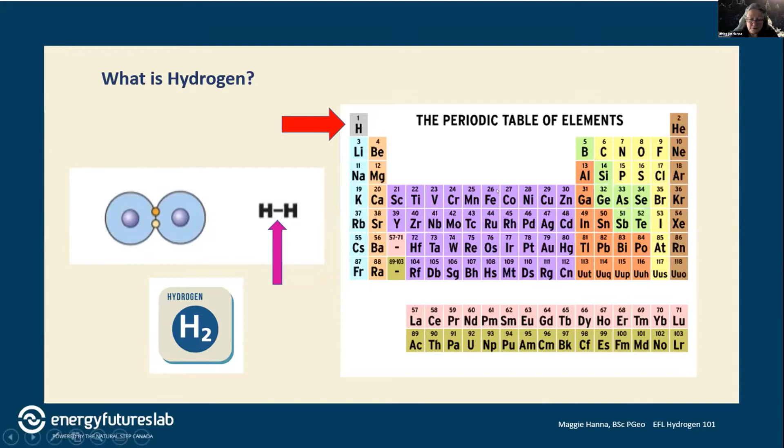There is a lot of hydrogen in the universe. About 73% of all the atoms in the universe are hydrogen, and it is the fuel of the universe. However, there's very little hydrogen roaming around by itself on Earth. Most of what we have is tied up in ocean water, so we have to actually use energy to make it. Hydrogen is therefore not an energy source, it's an energy carrier — or it can be called a fuel as well.

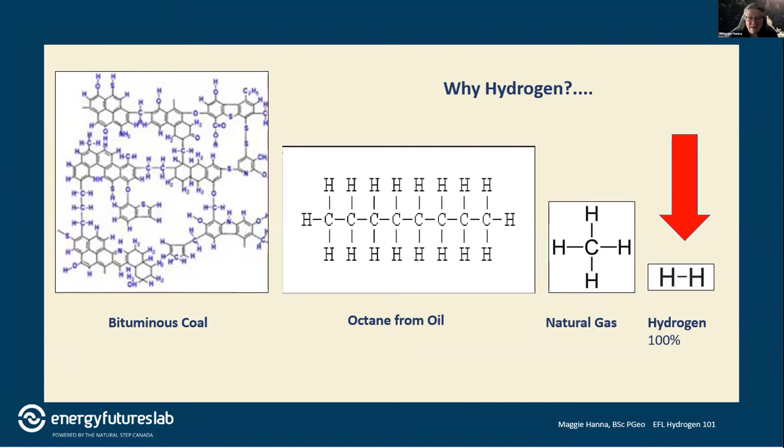So take some time to look at the hydrocarbon chemical structures. The first three molecules represent coal, oil, and natural gas, and you can see there are lots of carbon atoms in there. When we burn these for energy, CO2 gets released into the atmosphere. But where does the energy actually come from? Most of the energy is held in the hydrogen-to-carbon bonds, and when we break those bonds by burning hydrocarbons, we release the energy for our use. So why hydrogen? Shown with a red arrow, there are no carbons at all in hydrogen. So when we break the hydrogen bond for energy, no CO2 results, only water — and that's why hydrogen.

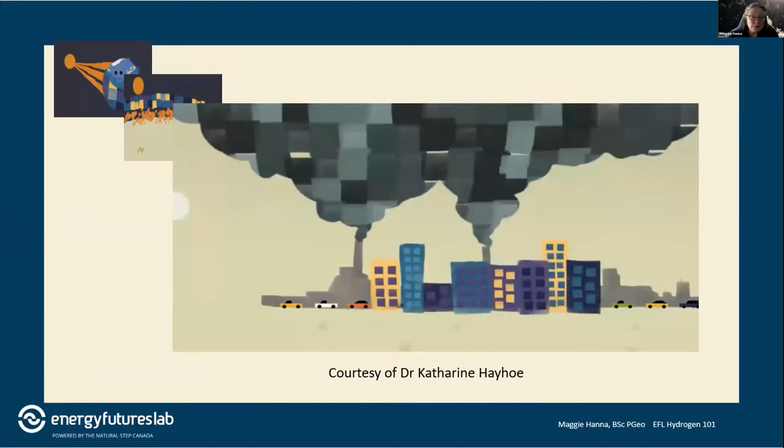So we're trying to keep our planet under 2 degrees Celsius of extra atmospheric heating, which doesn't sound like much because we think it's just about air temperature outside. No big deal, right? But that's not the way it works. That's weather, that's not climate. Climate is measured as an average of the weather over 20 to 30 years, and it works more like a fever in your body. If your body ran an extra, like a 2 degree chronic fever of say 39 Celsius, or for us older folks, 102 Fahrenheit, then you wouldn't be operating very well either.

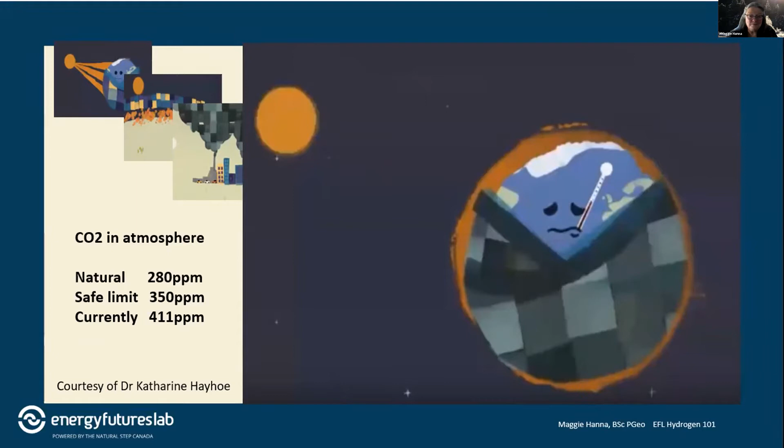Industrial heat like for steel and cement making. Seasonal large scale electrical power storage, hydrogen is the only thing we've got. Space and water heating, and feedstock for fertilizer production and other chemistries.

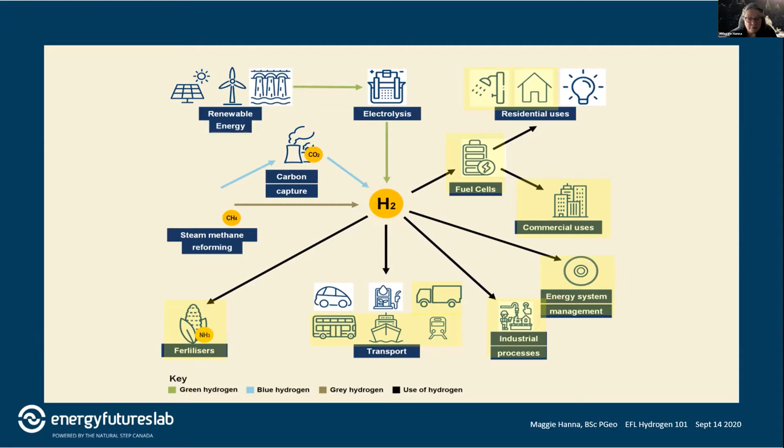The world is getting onto this now, and some countries are moving faster than others. Over 25 countries in the world have already published their hydrogen strategy. And in December, Canada released our federal hydrogen strategy, 141 pages, which was very well received, I might say. David Layzell, who you will hear from next, had a lot to do with that document.

So you can see that what really matters is not so much the color of the hydrogen, but it's the actual carbon footprint. Anything less than 5 kilograms of CO2 is considered to be low carbon hydrogen by the European Union. Still, I think it's useful to know what the colors mean, so let's get into that.

Generally, the 3 lowest carbon footprint hydrogen processes are pink, which uses nuclear electricity for electrolysis, which splits water into hydrogen and oxygen, and also green, which uses renewable electricity from hydro, wind, solar, tidal, wave, geothermal, to do the same thing. And also blue, which uses natural gas and water to make hydrogen and CO2, on the condition that that CO2 is sequestered permanently in the ground. They are all considered low carbon hydrogen by the EU's definition. So that's the first 3.

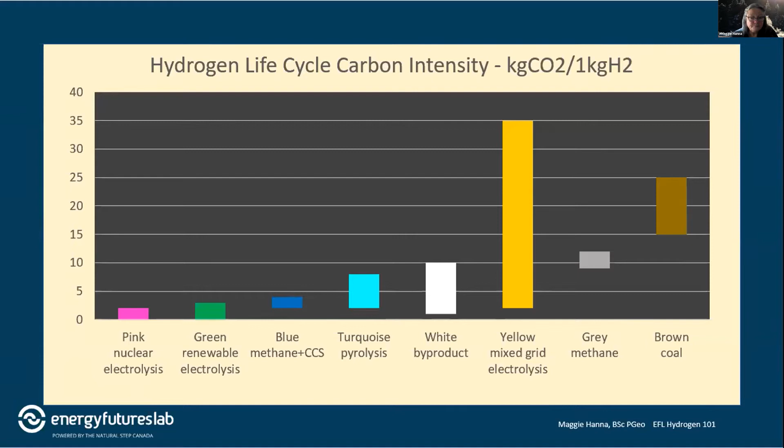Turning to the Canadian domestic hydrogen market, we estimate by 2050 Canada alone will need to produce about 7 times the amount of hydrogen that we do today. This means going from 8,000 tons of hydrogen a day to 58,000 tons a day. Now, that's a big domestic market. How the heck are we going to get that done?

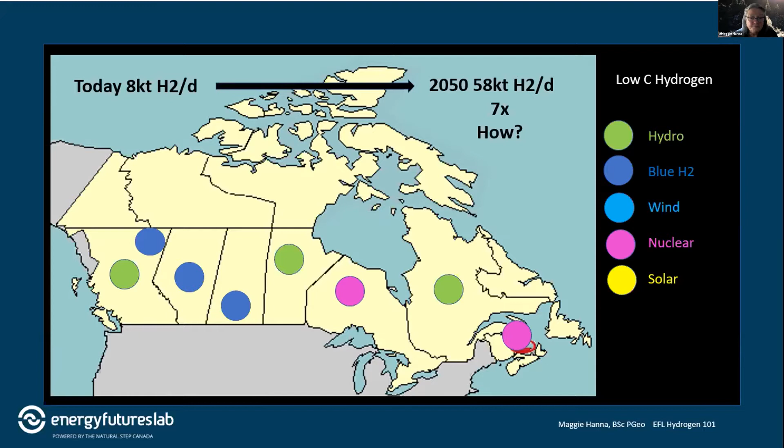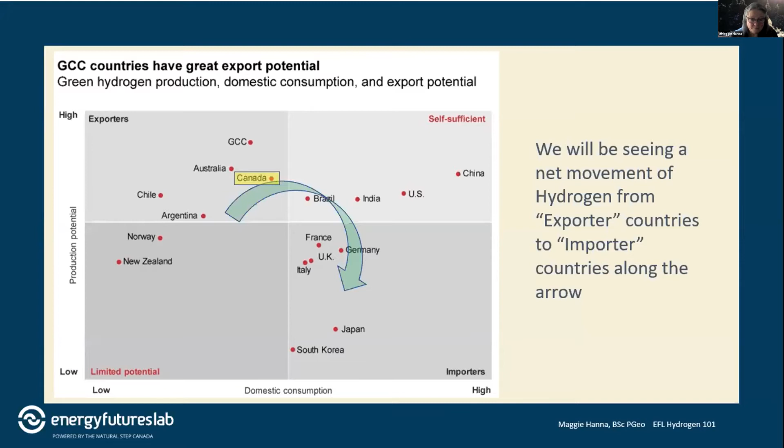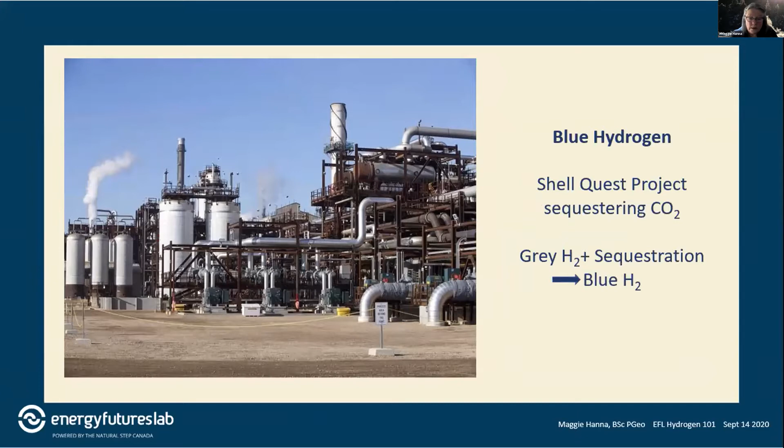The Industrial Heartland Working Group have set the stage to be Canada's first hydrogen hub northeast of Edmonton, and is working with the Transition Accelerator. Dave Layzell will say more about that right after this presentation is done.

So the AZETEC project, out of the University of Calgary's CESAR group, is building 2 big hydrogen fuel cell powered Class 8 freight trucks for test runs between Calgary and Edmonton starting this fall. Now, I want you to notice the range of companies in this collaboration. Collaboration is the only way we're going to get this hydrogen economy thing done, because of the chicken and egg nature of supply and demand when it comes to hydrogen. Hydra is another one of our corporate gems involved in hydrogen trucking, as you will be hearing from the President Badr today. So that's pretty lucky.

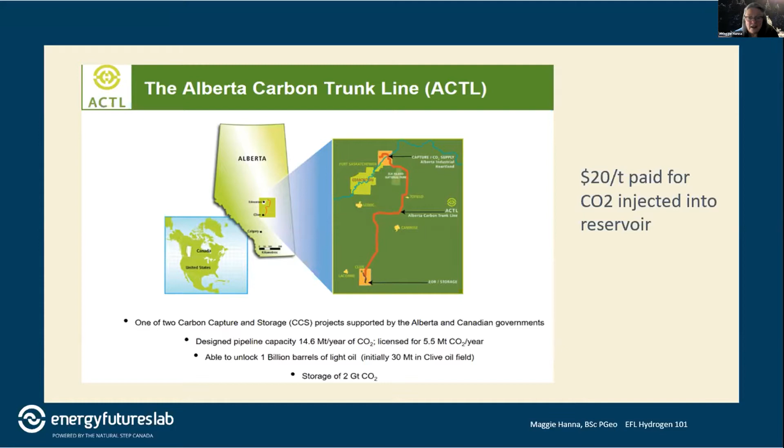ATCO is working on blending hydrogen into natural gas pipelines in the city of Fort Saskatchewan.

Maggie, your audio just went out. Can you hear me? Am I back? Oh, I just got your internet connection is unstable sign. Can you hear me now? Yeah, loud and clear now. Okay, so let's just go back to this.

So if you didn't hear me, I just wanted to say that ATCO is mixing 5% hydrogen into their natural gas lines, and they hope to ramp that up to about 20%.

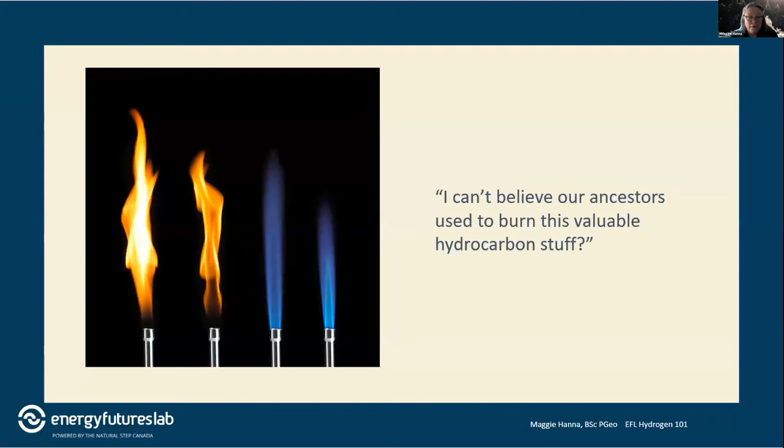So now we'll go next. Bottom line is, in Alberta we have a good start, but we have a lot of work to do collectively. Some jobs to generate and some carbon to mitigate. But if we get this post-carbon energy transition stuff right, future generations will look back at us and laugh, saying, I can't believe our ancestors actually burned this valuable stuff. It's good for so many other things.

You're really in for a treat today, hearing from some of the movers and shakers here in Canada. They're the people that are actually making this happen. So finally, thank you for your kind attention.

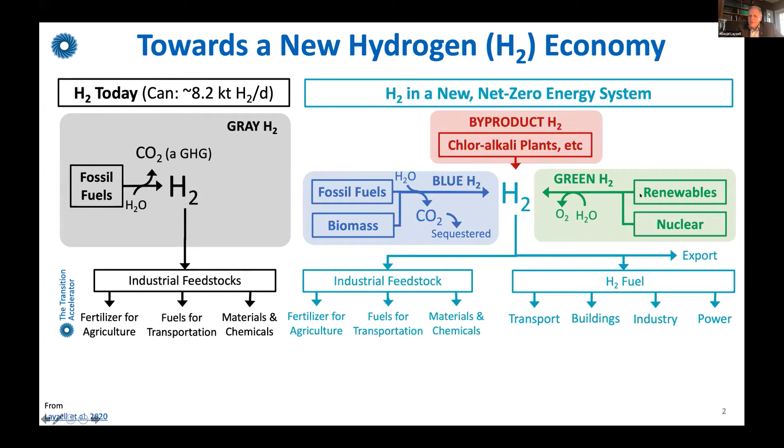And with power generation, hydrogen could become a form of long-term energy storage, electricity storage, because you can use electricity to make hydrogen and then use hydrogen to make electricity again.

And certainly of all the countries they looked at, Canada is the lowest cost in the world for making green hydrogen. But what you'll notice here is that blue hydrogen today tends to be less expensive to make than green hydrogen. Indeed in Alberta and Western Canada, blue hydrogen is about half the wholesale cost of diesel and about 1/3 the retail cost, so that opens up a really interesting opportunity for trying to grow a hydrogen economy with those kinds of feedstocks.

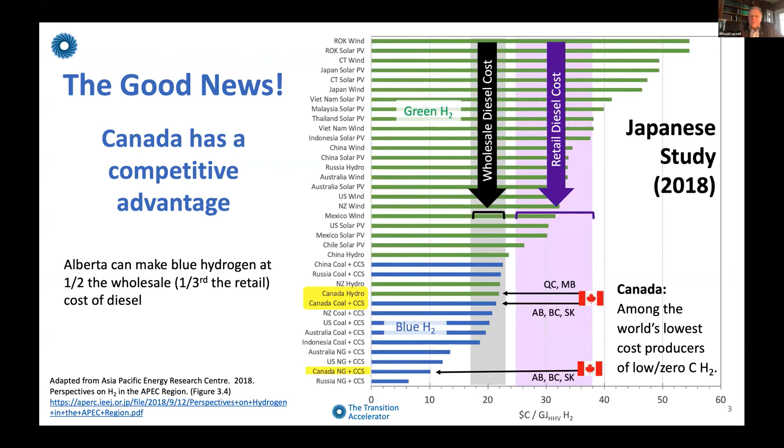But the challenge with hydrogen is that it's a gas. We could make it quite inexpensive, lower than the cost of diesel, but it's more expensive to move and store around than liquids.

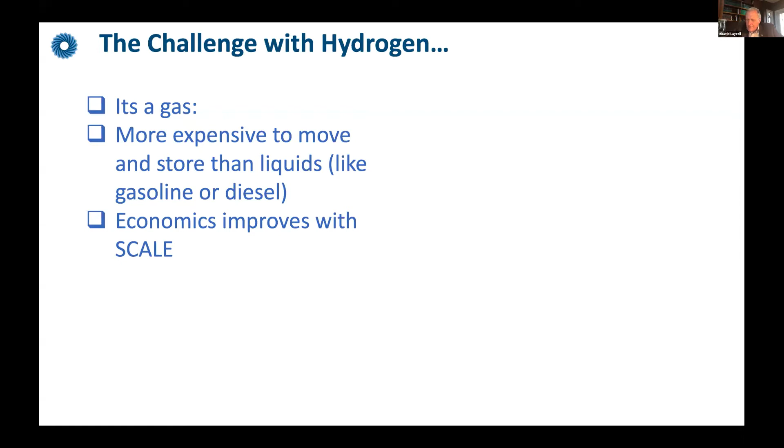The other thing is the economics improve with scale. So as you start moving more hydrogen around and having greater use of hydrogen, the actual cost comes down quite dramatically. So our analysis is we really have to go big or go home - we have to get to scale quickly.

So what we are arguing is we need to focus on hydrogen hubs - places where we have low cost hydrogen production, substantial nearby market demand, and a cost-effective connection between the supply and the demand. The most obvious is pipelines, especially if we can get to scale where pipelines make sense. And we need engaged industry, governments, and academics working together to put this new value chain in place.

We've been looking at where to do this across Canada. One of the areas we see as a significant opportunity is in Alberta, around areas where we already have large-scale industrial blue hydrogen production. Including the cost of CO2 capture, we can make hydrogen at about $1.50 a kilogram.

And we can then piggyback on that kind of industrial infrastructure, pull a pipeline off, and provide the hydrogen to buses and trucks, to trains, for transportation, space heating for homes or commercial buildings, and even possibly for power generation. And this pipeline, the same infrastructure, could be used to bring green hydrogen to market as well, if the pipeline goes through a region where we have good green hydrogen production.

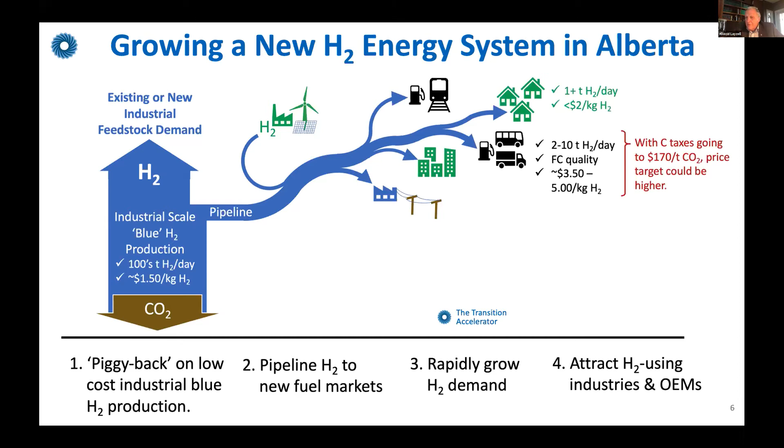The idea is to have pipelines connect to new markets, rapidly grow these demands for hydrogen, and also attract an opportunity to bring in internationally hydrogen-using industries and original equipment manufacturers that are interested in benefiting and growing their business through hydrogen supply and demand.

Within Alberta, one of the most promising areas is right near Edmonton, and we call it the Greater Edmonton Hydrogen Hub. It already has a hydrogen pipeline shown here. As Maggie talked about a bit, it has the Quest CO2 line up here, and the Alberta Carbon Trunk Line for enhanced oil recovery here.

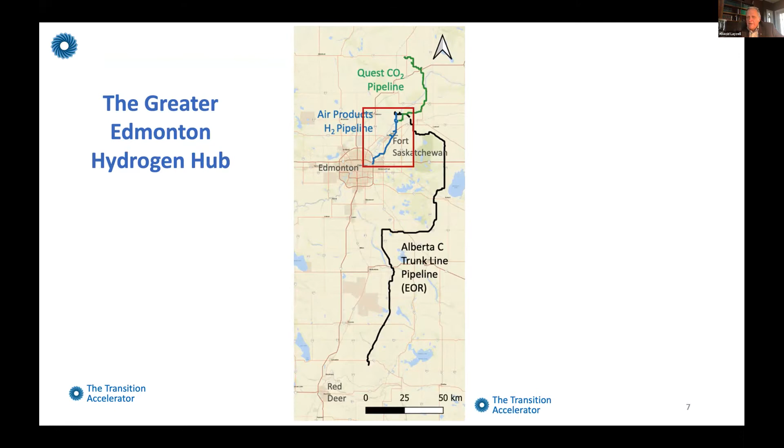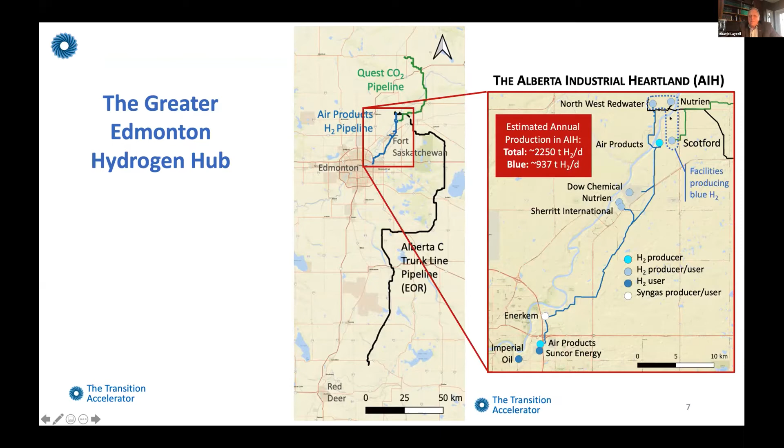So two pipelines that carry away the byproduct, the CO2 that you create when you make blue hydrogen, and a number of companies that would be using that hydrogen. In fact, three of the companies already are producing blue hydrogen and putting the CO2 in the pipeline. So what we see here is the opportunity to find markets, potential market sizes.

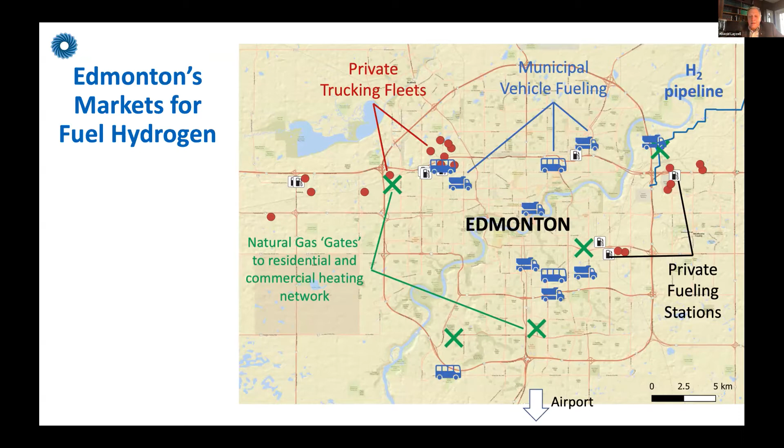We've estimated in the work we've been doing that there's a potential in the whole area for transportation demand of about 670 tons of hydrogen a day. This is just in the Edmonton region. There's potential for space heat in the 1,500 tons a day range, which would of course be higher in winter than in summer, and potential for export in many thousands of tons per day.

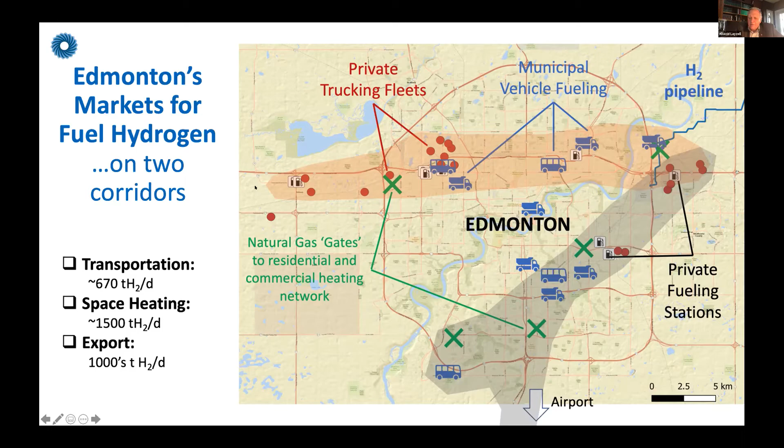The important thing to note is that virtually all of the demand for these occurs on two main corridors, both anchored where we can produce low-cost blue hydrogen. One is a corridor that comes diagonally through Edmonton and heads down towards the airport; another one across the top of the city. So the conclusion here is that hydrogen hubs are needed in order to get to scale.

And to build a resilient new hydrogen energy system, an energy system where we can get production to a sufficient scale to keep the price low, and get demand to a significant scale, in order to have a cost-effective linkage—typically pipelines, but not absolutely necessarily—that would link the supply to demand. These should be deployed at strategic locations across Canada.

Edmonton is one location where we see opportunities; certainly Prince George—we're going to hear about some exciting opportunities there. Sarnia, Ontario, there are places in Quebec, places in Eastern Canada, a number of other places, I would say in British Columbia and in Alberta, that we could actually build significant demand centers around. And then we need to grow these demand centers and interconnect them to serve other communities. We see this as a key part of the strategy, the pathway to a net zero future.

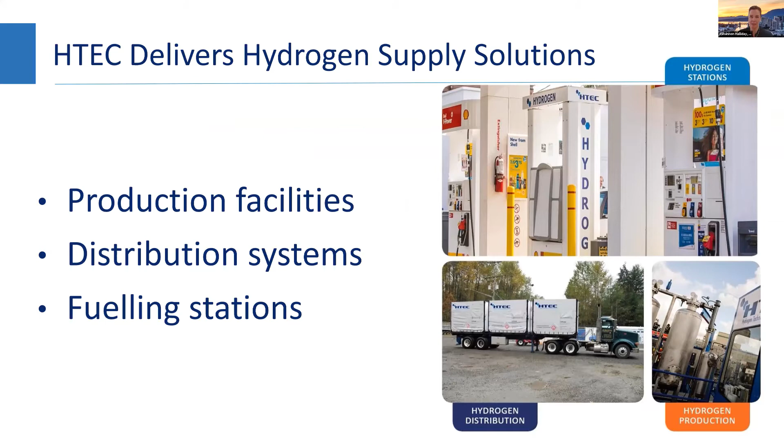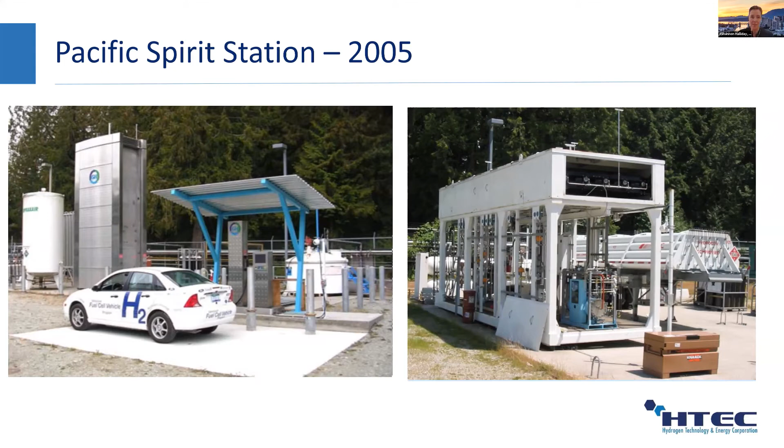It was in the spring of 2005 when the Ford Focus fuel cell vehicles were first delivered to Vancouver. I was working for Natural Resources Canada at the time, and we had funded part of this station. My office was based at the National Research Council building. If you walked out the front, if you were lucky, the compound wouldn't be locked, or you had to walk down the freakishly long hallways of the National Research Council, past the hydrogen safety labs, into the back towards the forest, tucked in was this fueling station. There'd usually be quite a lot of researchers in lab coats milling about. Although there were really excellent learnings happening as part of this station, it is not something that would inspire a quick commercial uptake.

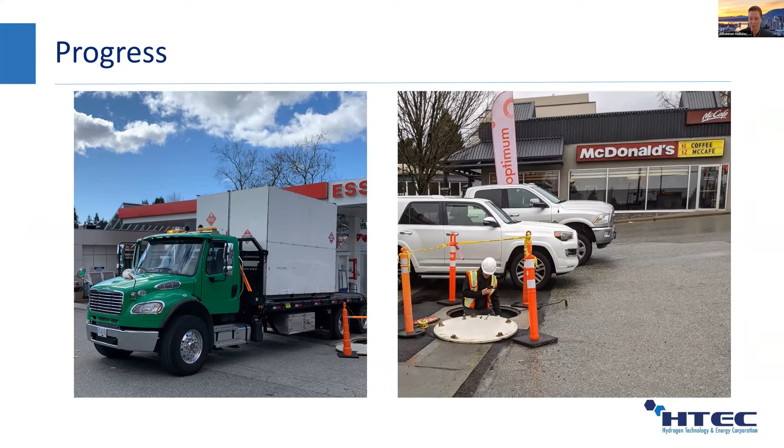Fast forward to the present, this is one of our stations that we opened last year, and our hydrogen delivery truck is delivering, this was just a few weeks ago, hydrogen and power cubes to the station. If you look at the manhole beside the truck, and then in the next picture at the manhole, what do you see in the background? You see a McDonald's, and nothing says that you've achieved a certain level of public confidence like being in spitting distance from a McDonald's. There's no locked compounds, there's no lab coats. We've come a long way in the last 15 years.

And so another way of looking at HTEC in the value chain is looking at it as the glue.

As Maggie mentioned, you can produce hydrogen in a variety of ways, and that's the clean energy supply at the beginning. At HTEC, we currently have green hydrogen production, and we are investigating blue hydrogen projects as well as more electrolysis projects.

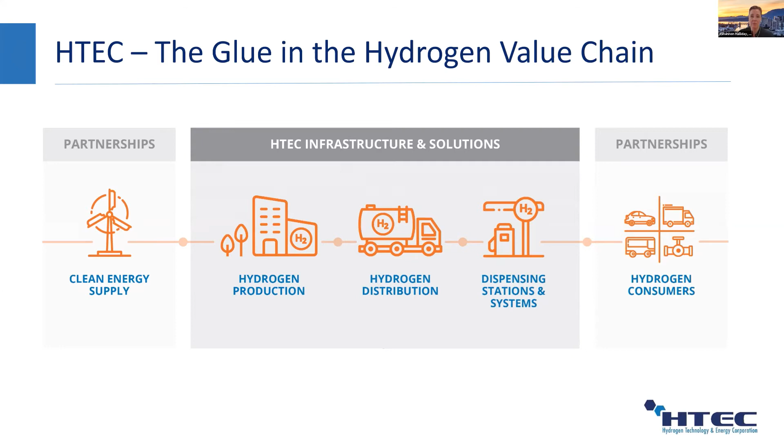At HTEC, we have two business platforms. One is the infrastructure platform where we produce, distribute, and dispense. The other is our technology solutions platform where we help others with their hydrogen needs, from project development, design, engineering, specialty and packaged products, operations and logistics support. And we work in partnership with hydrogen consumers.

We have a station in Quebec with Harnois right now, with 2 more under construction in Quebec. We have 4 stations in operation in BC, 2 with Shell and 2 with 7-Eleven, with 5 more in construction or under development. The next one to open will be a 7-Eleven station in Kelowna. The stations we have in operation right now are light duty stations, but the ones we're opening will be a combination of light duty, medium duty, and heavy duty.

We also have a station in California with electrolysis on site that is opening up this summer.

I just wanted to highlight why light duty is important. It allows options for the public, increases public awareness, advances codes and standards, and all of the cost benefits realized in light duty applications are then applied into larger applications like buses, trucks, and trains. As David mentioned, scaling up is really important, and that's one of the things that light duty allows us to do.

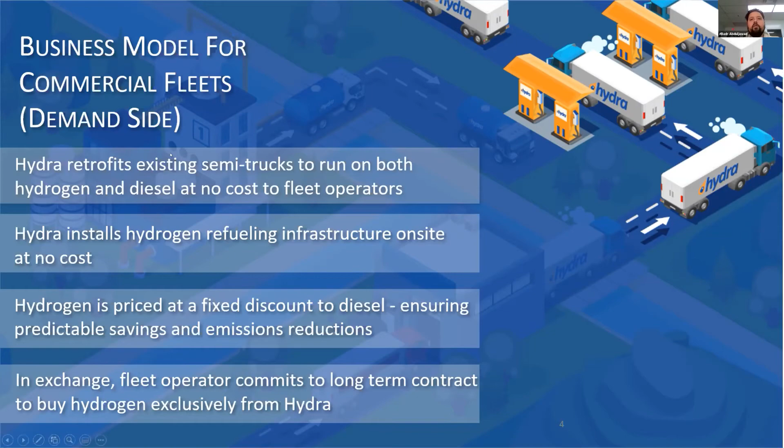So there's no loss in power or torque, no loss in payload, as I've already mentioned, and you guys can see that from our testing results. This retrofit is basically just adding a hydrogen computer that talks to the diesel computer with some hydrogen tanks and hydrogen injectors. And this basically co-combusts with the diesel, so it is a gaseous fuel.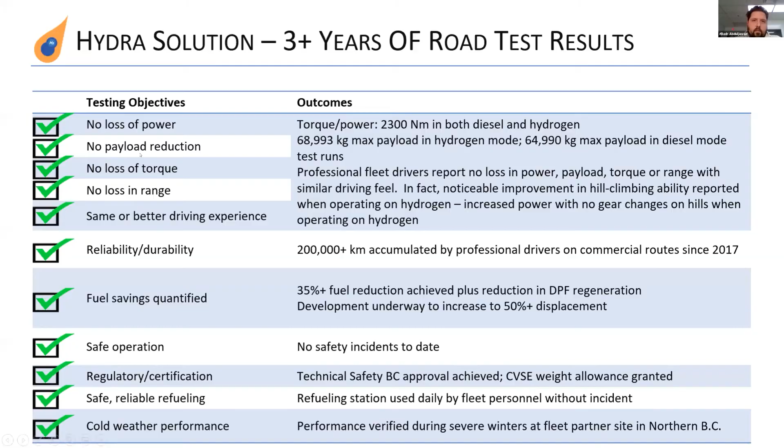And then Hydra's business model is to go with and capture some waste hydrogen. And as Maggie touched on this a bit earlier, in BC, this is considered green hydrogen. And it's also, I guess, considered white hydrogen because it is a byproduct.

So we will expand this business model in a more cost-effective manner. Including hydrogen from electrolysis. It meets our renewable gas content by reducing carbon tax as well.

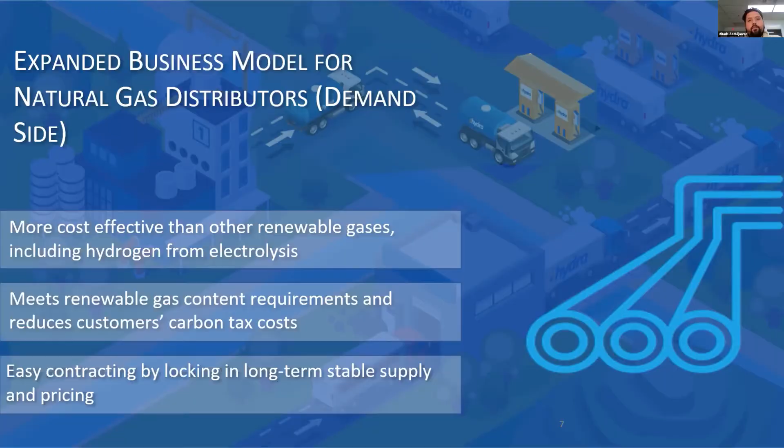Our first project is 65 dual fuel hydrogen semi-trucks. Our first station, the first hydrogen station, would actually be the largest in the world. And it's about six times larger than the fueling station currently in Shanghai.

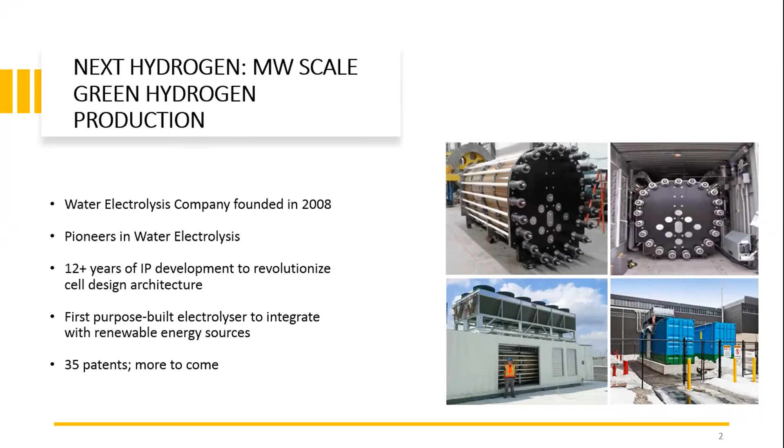Where am I today? I'm actually at a Canadian Tire site in Bolton, Ontario, where we're commissioning a 300 normal cubic meter an hour plant. That's a plant that produces about 650 kilograms a day if it's operating continuously. The plant, of course, operates around electricity market opportunities, so it's not operating continuously. Canadian Tire's purchased 3 of our units. The hydrogen is used to provide fuel for a fleet of forklifts - these are fuel cell powered forklifts.

The interesting thing about this project and what we're doing with Canadian Tire - the project started about 5 years ago. There's no government funding; this is all run off capex, which Canadian Tire has. Canadian Tire is a little bit different in that they were really curious about hydrogen and how it could be scaled up as an infrastructure using electrolysis, producing green hydrogen. They also have a significant presence in retail transportation fuels.

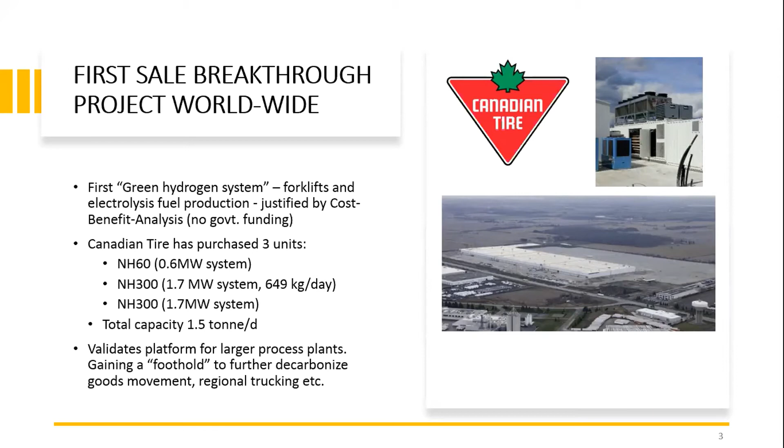So that's where we're at. We're operating systems here at Canadian Tire, scaling up the company. Of course, this is a great time - this is a good time to be in the hydrogen business. So we're pushing forward with building our company and expanding it. But I'll talk a little bit about our electrolysis technology, and that's really our raison d'etre.

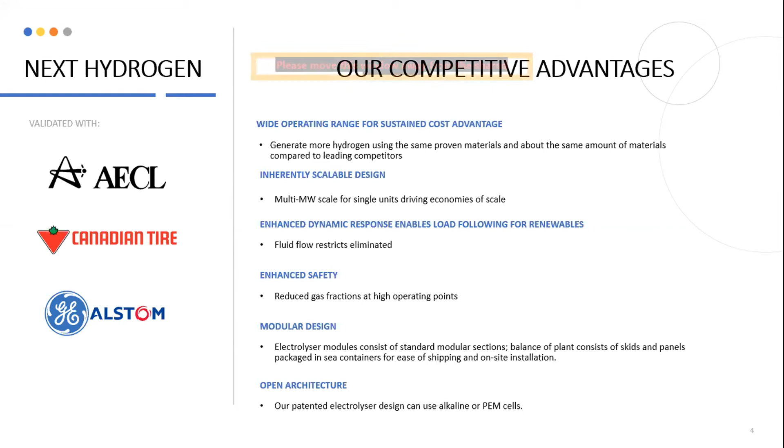This is what we bring to the market, and we think it's a class winner here. So, as I said, the challenge given to the team was to develop a more flexible, more easily integrated electrolyzer, and that involves building at scale - multi-megawatts per unit, advanced enhanced dynamic response, and other things that one would expect in terms of what the market requires today.

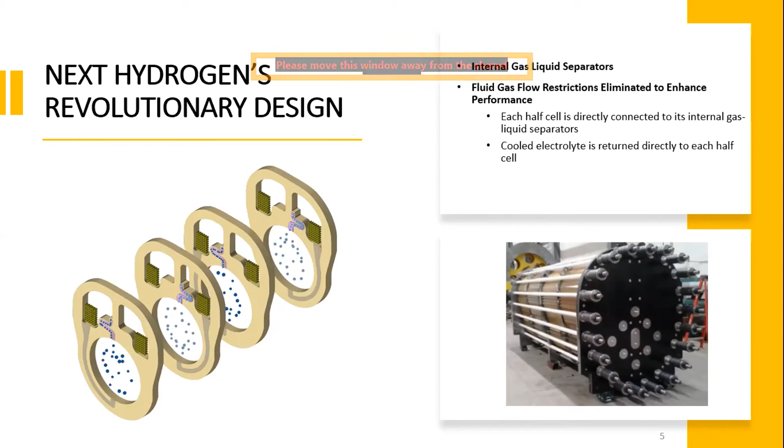What that buys you is, when you look at our system versus a conventional electrolyzer - I'm showing a conventional alkaline electrolyzer, we are also an alkaline electrolyzer, but our architecture can work in both alkaline and PEM - the circulation of the gas-liquid system is actually circumferential and up through the cell, whereas conventional systems have this very long path that goes along the axis of the electrolyzer. One would expect the process dynamics on the left-hand side to be less favorable than the one on the right-hand side, and that's really the architecture we have developed. It's patented, it's unique.

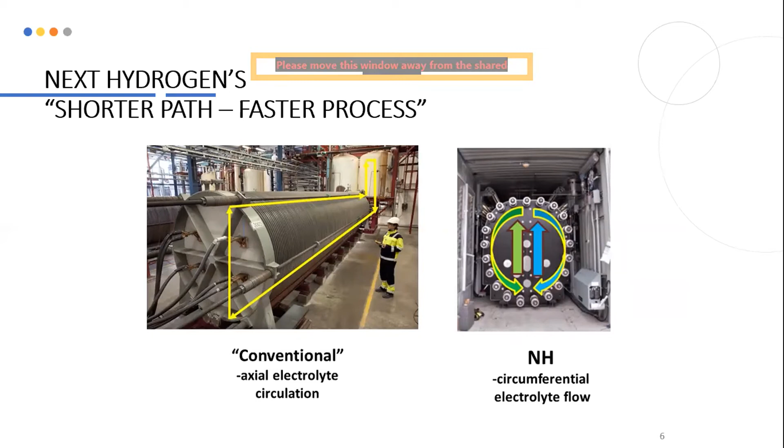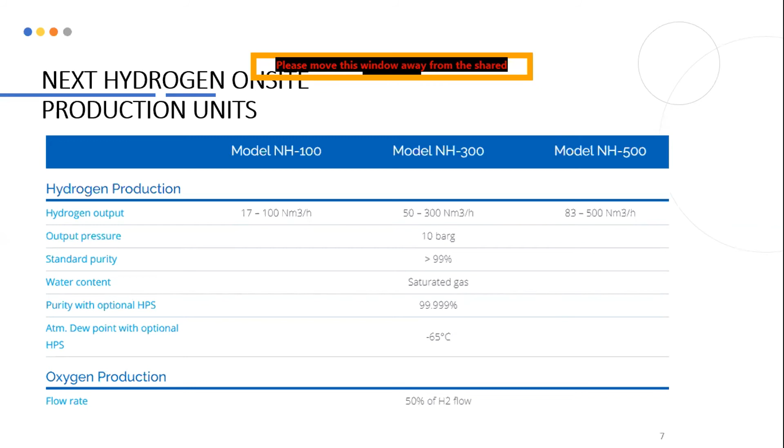It responds quickly to changes in power input. We sell product currently in the 100 and 300 normal cubic meter per hour sizes, and we'll be in a position to release the NH500, I think, in 2022. So that gives you a quick outline, a quick introduction to our company.

And what we're doing - as I said, we're a manufacturer of large-scale electrolyzers, and likely our roadmap leads to even larger units. So something we call the Green, which could be built into dedicated renewable hydrogen projects. Again, we have the flexibility because of our architecture and our ability to operate at very high specific production rates, or what we call current density, which allows us to produce a very capital-efficient large-scale plant.

And with that, I'll take questions. There's a couple quick questions about the retail cost of hydrogen, and a lot around the fact it's intermittent. Can you maybe answer how best to address that question?

Okay, so there's a lot going on with hydrogen and electricity these days. If you look at these large dedicated projects, in Australia or the Middle East, you're looking at renewable power prices less than 3 cents a kilowatt hour. You're getting production costs in the $2 to $3 a kilogram range, based on a life cycle cost of hydrogen basis. If we're looking at something like Canadian Tire, what we're targeting is less than $10 a kilogram in the vehicle. This is purpose-built infrastructure, meaning very good capital utilization. It means electricity rates according to ICI, without the global adjustment in Ontario, which would put it around 8 cents a kilowatt hour. So we're coming in at less than $10 per kilogram in the forklift - that includes the infrastructure, the compressors, the dispensers, etc.

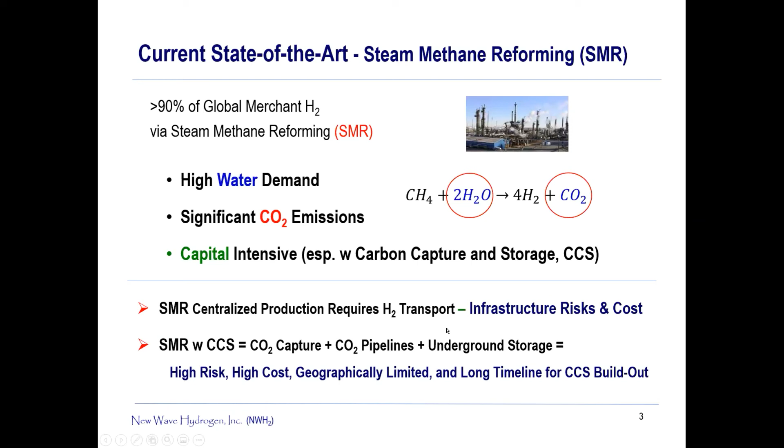So for SMR to become a low impact technology, or greener or blue hydrogen production, it would require a parallel build out of CO2 pipelines and many different new storage infrastructure programs. And this is a really high cost, it's high risk, and it's going to take at least 10 to 20 years or more to have a significant impact, due to the timelines and build out.

So what we suggest is a fundamentally new approach to methane pyrolysis. I call our process a new energy paradigm because we don't need electricity to drive the reaction. We use the pressure inherent in a pressurized natural gas pipeline to drive the shock wave. So it's an efficient use of energy, and it can heat the natural gas to temperatures high enough to directly crack the methane molecule into hydrogen and solid carbon. And these are both valuable products. But as you can see, there's no water and no CO2 in the equation.

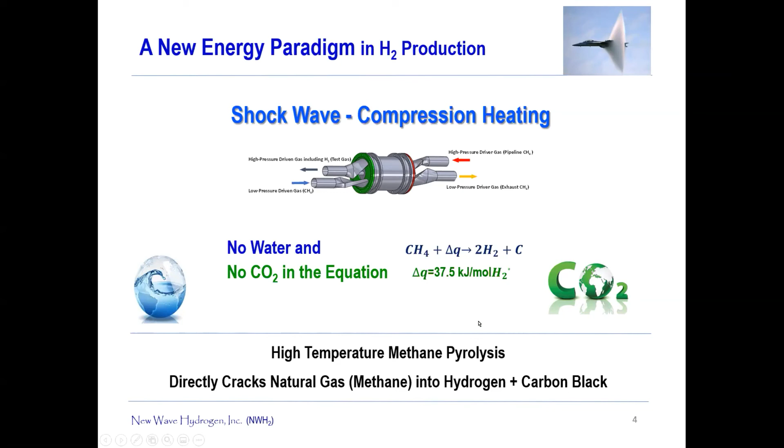This is a new application of wave rotors. Wave rotors have been around for about 50 years, so it's very low risk in terms of development. We're using a core component that's been known for 50 years, and in fact, all of the components in our process are standard and commercial. Our patented innovation is the novel application. So we use wave rotors to achieve gas temperatures sufficient to directly crack methane into hydrogen. So it's a new use of this technology.

Wave rotors can be envisioned as a rotating barrel of shock tubes with end plates that have ports in them. And when a closed port aligns with one of the shock tubes and we introduce a pressurized gas, the gas reflects off that closed port in an enclosed space and creates a shock wave. So it's kind of a supersonic speed that compresses the gases and transfers heat. So we amplify the temperature of the natural gas.

We have tremendous global partners, with whom we've launched from Canada a 2-year program, and hope to achieve a field pilot by the end of 2023.

This 2-year program is funded both by industry and agencies in Canada as well as Europe. Some of the partners mentioned are on our team: AMTA and the AZETEC program are doing hydrogen fuel truck trials, along with the Transition Accelerator and CESAR. They've been tremendous partners, and we're really excited to be working with them.

The NGIF is a natural gas innovation fund, a consortium of natural gas producers and distributors in Canada, and they're a co-funder of ours. Total in Europe is also a co-funder, as well as GRTgaz, a major natural gas producer in Europe. We've also been co-funded by ERA, the Emissions Reduction Alberta.

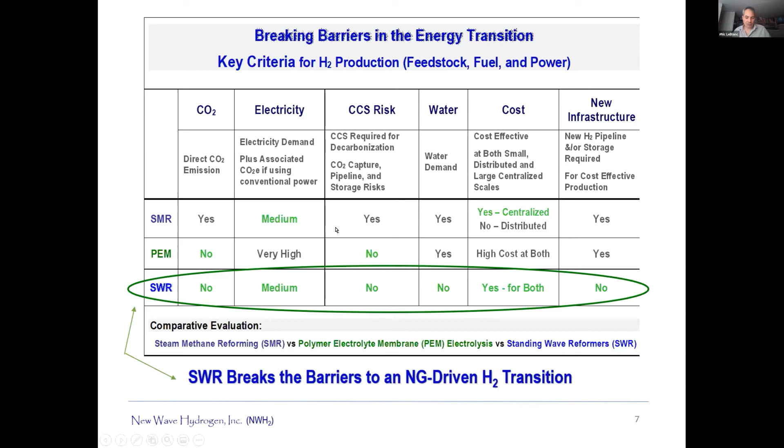Okay, so in essence, really the key to our differentiation is that we can use the existing infrastructure, the natural gas distribution infrastructure. We don't need any new CO2 pipelines, we don't need any new hydrogen pipelines, and we don't need carbon capture and sequestration. We use what's already existing to move the transition forward in a very quick manner.

And it's the same with export. We don't need new types of ships or chemical transitions to hydrogen, because you can export the natural gas the same way we do right now, and export the technology to produce hydrogen on demand wherever you have a pressurized pipeline.

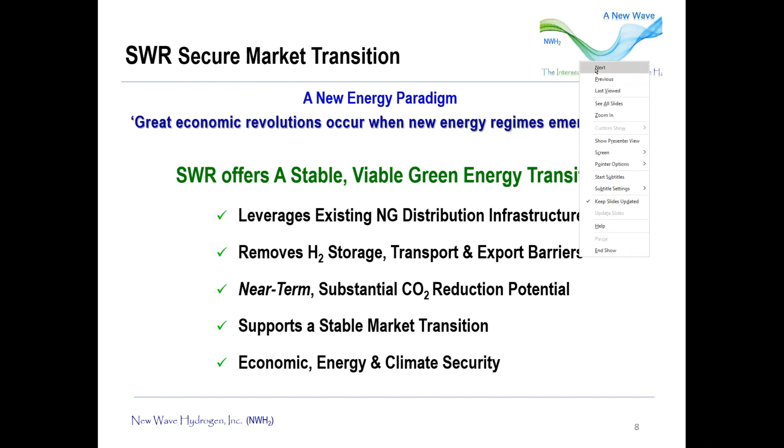Okay, these are some of our end markets.

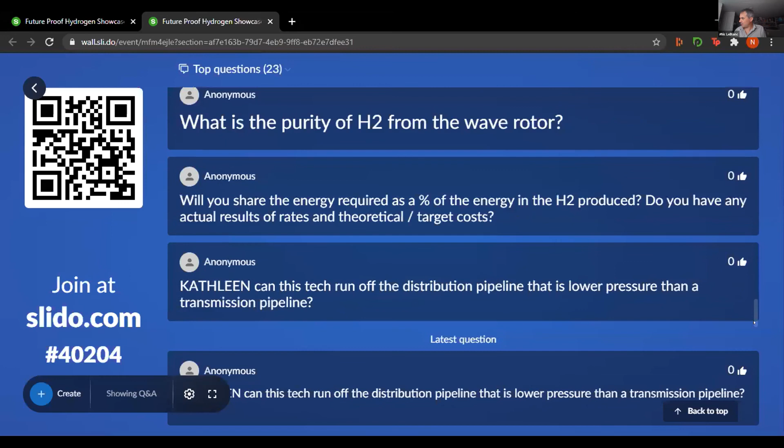So part of it is, what's the percentage, just an idea of the amount of energy used, and how does this kind of hydrogen production compare to other methods in the amount of CO2 and energy?

Okay, so the purity can be as high as 5 nines, 99.999, or 4 nines. We have different designs for different applications. If we're admixing into a pipeline, like the ATCO project referred to earlier, we only need 20% of the hydrogen conversion to go to the pipeline. We can have a high purity at 20%, or if we're going into a fuel station, we'd have very high purity, and we polish it using a pressure swing adsorber, a PSA system. The energy required is very low, again, because we don't use electricity to drive the reaction. It's a shockwave driven reaction based on the pressure drop. We can install in any pressurized pipeline and use that letdown, or drop in pressure, to drive the process.